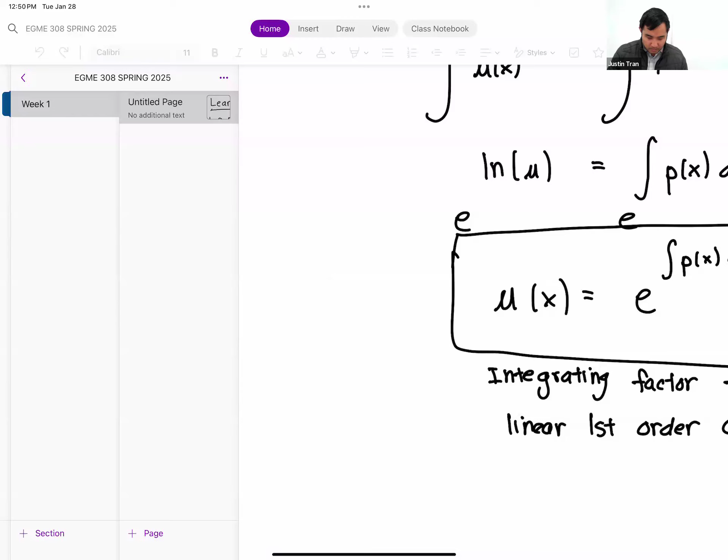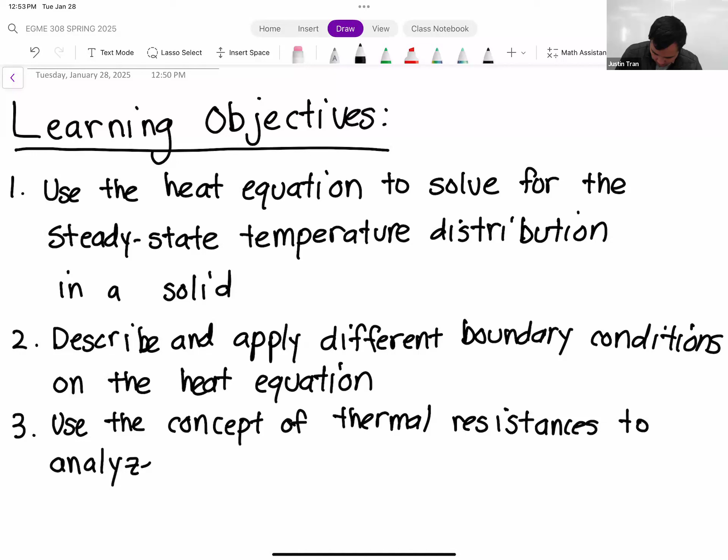So, for my graduation, I went into my graduation status this morning. And I applied back in like October. I'm still in the department. Yeah, we're working on it. So the first 2 weeks are a little bit hard for us to get to it just because things are a little bit hectic. But we're gonna get to it weeks 3, 4, 5, and 6. Gotcha. You'll be good to go. Okay, cool. Because I want to double check, like I said, it's been like 2 months now. So administratively, we didn't pull it until January. The system only lets us pull then. You're in the system. We're gonna do it probably in the next couple of months. Okay, perfect. Thank you.

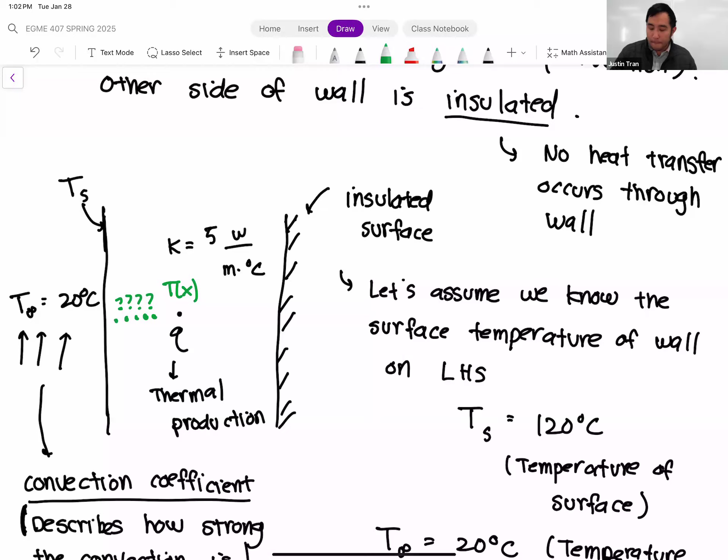And so in this problem right here, we have a wall, and we have numbers this time, which we didn't have last time. The length of the wall is 50 millimeters. I don't have it included here, so let me go ahead and draw that in. So the thickness of this wall is 50 millimeters. We know the thermal conductivity. Thermal conductivity is 5 watts per meter degrees Celsius, okay?

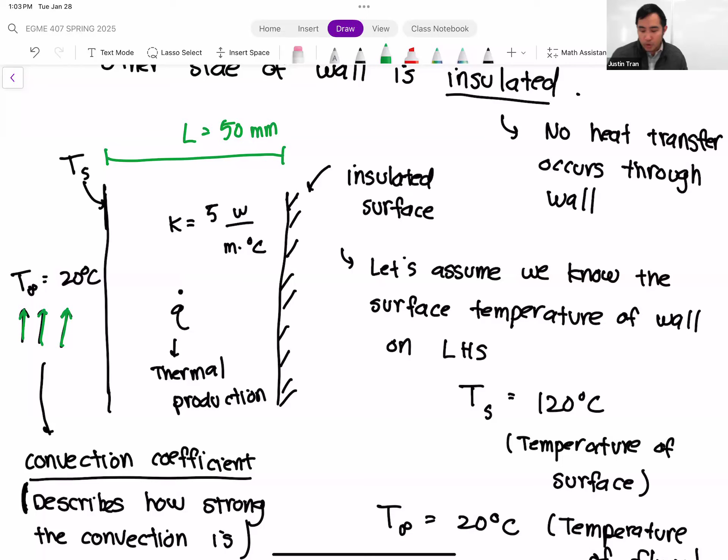One side of the wall is exposed to convection. So on the left side of the wall here, we have a moving fluid that's pushing past the wall. The temperature of that fluid is 20 degrees Celsius. And the right side of the wall is insulated. I mentioned it briefly last time, but insulated just means that there's no heat transfer that can occur past that wall. It's very much the same thing as an insulated oven mitt, right? The reason you use oven mitts is that they're made of a material that makes it very difficult for heat to pass through them.

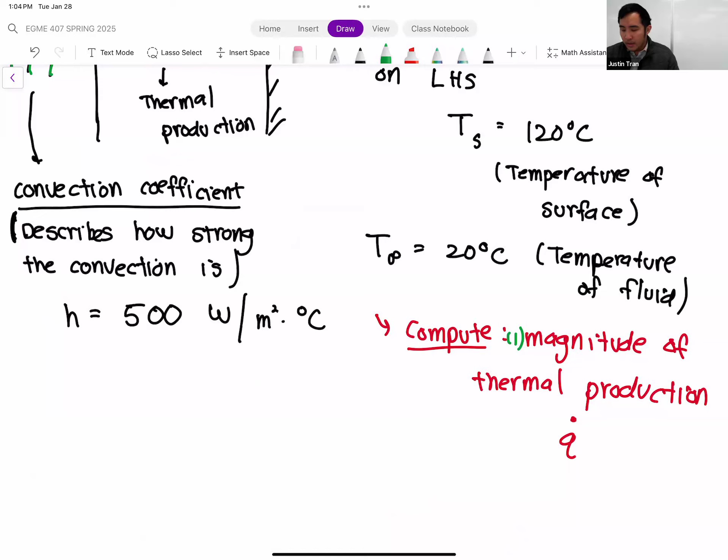Another thing that we know is the surface temperature on the outside of the wall here. So this TS right here is 120 degrees Celsius. And we actually want to compute a couple things in this problem. So, here's our setup. One thing that we want to compute, that we mentioned last time, is the magnitude of thermal production that's going on in this wall, because this wall is special. It's actually able to produce heat. But along the way, we're also going to be solving the heat equation, so we also want to solve for the temperature distribution.

T of x. We're going to be solving the heat equation, so we're going to get a solution for T of x just as a byproduct of that. So this is very similar to the last example that we did. It's just that there's some more stuff going on. So whenever you have a problem that's asking you to solve for the temperature distribution, or T of x, that tells you that this is a heat equation type problem.

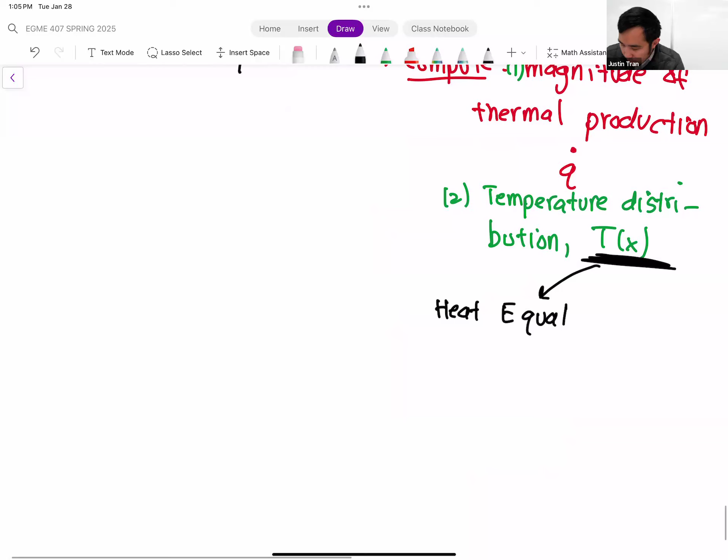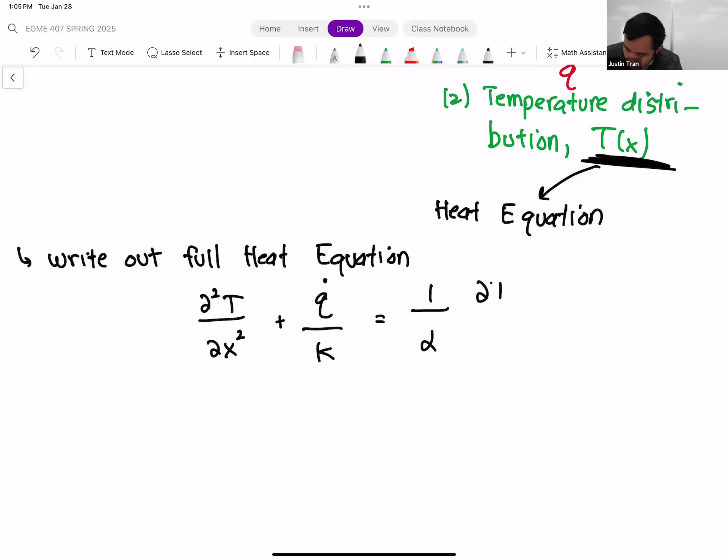And so heat equation problems always start by writing out the heat equation. So let's write out the full heat equation. You have partial squared T over partial x squared plus q dot over k is equal to 1 over alpha, partial big T over partial little t.

Okay, so I would recommend, whenever you have a heat equation type problem, start with this. I know in every single problem we're going to be canceling terms based on our assumptions, but it's always good to start here just so that you kind of know what you're doing. Okay. So our heat equation here, right now we can't solve it because it is a partial differential equation. So the next step is to cancel some terms based on our assumptions.

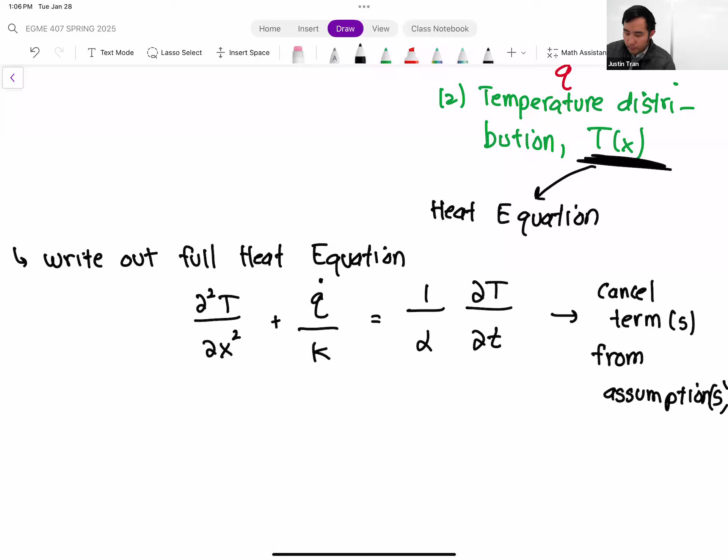So let's list out some assumptions for this problem. For this problem and for basically every problem that we're going to be doing, the first assumption is that we have a steady state problem. So any partial derivative with respect to time equals 0. You can see we have one term like that: the entire right-hand side, where we have the partial derivative of the temperature with respect to time. From the steady state assumption, we can cancel that out.

As a consequence of this, we can take our spatial derivative and transform it into a regular derivative. This is mostly a superficial change, but it is true because now our temperature is only a function of x. Since it's only a function of one variable, we can change the partial derivative to a regular derivative. It doesn't really change the way you solve it. You're still going to be integrating it, but it's good to change.

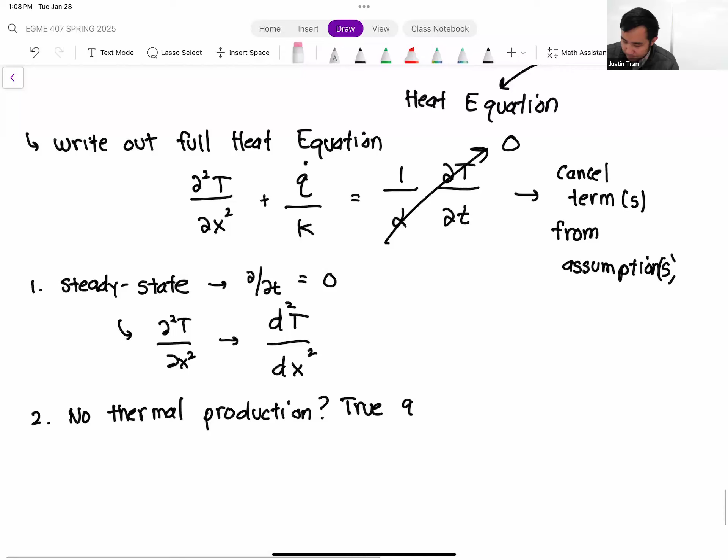Now, if you look back at our last example problem, another assumption we made was that there was no thermal production. That's normally going to be the case because most materials that you're going to be working with as an engineer are what I call inert materials, so they're not capable of producing any kind of thermal energy. I'll say this is true 90, even higher, maybe 97.333 repeating percent of the time. So thermal production is not a common occurrence.

Thermal production, remember, is the second term in this equation, the Q dot over K. Normally we're going to cancel that term out as well. But this problem belongs to the 2.6666 repeating percent of the time where we actually do have thermal production. So in this case, we're not going to cancel it out, but most of the time you are going to cancel out that Q dot term.

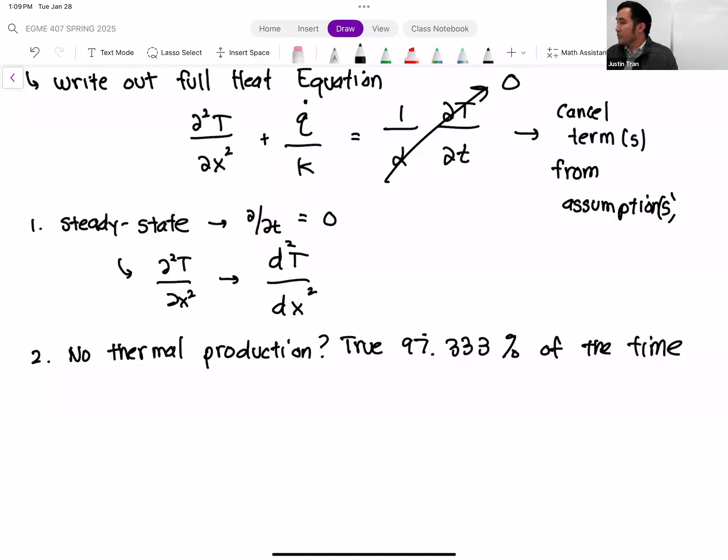Questions? A reminder of what alpha represents. Oh yeah, we didn't actually cover that last time. Alpha is a parameter known as thermal diffusivity. I skipped over it because right now it's mostly not relevant since we're doing steady state stuff. We'll come back to it in week 4 or 5, depending on our pace, when we do transient conduction. In a nutshell, thermal diffusivity tells you how quickly your material can absorb and store heat. It's almost like thermal capacity, but combined with a couple other things like density and thermal conductivity. For now, it's mostly not relevant.

Since we're going to keep the thermal production term, let me rewrite our heat equation. For this particular problem, our heat equation is like this. The good news is that the thermal production and the thermal conductivity are both constants, so neither depends on x. So we can subtract this term from both sides, moving it to the other side of the equal sign. So we have d²T/dx² equals minus q dot over k. And since that term is a constant, we can now integrate.

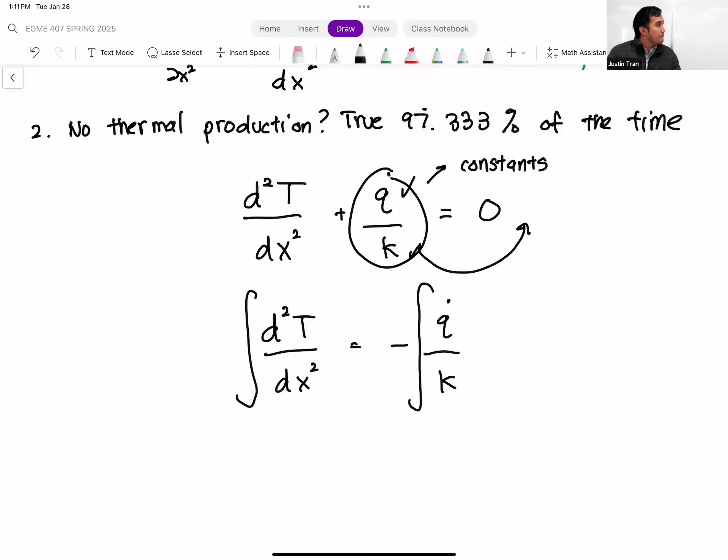Okay. And we can just integrate this straight up, which is quite nice. So we integrate this with respect to x. On the left-hand side, that integration is going to cancel out with one of the derivatives, and so we just end up with dT/dx. On the right-hand side, we integrate q dot over k, which is a constant. So you have minus q dot over k times x. We have to add our C1, because we're doing an indefinite integral.

And then to complete the problem, let's integrate one more time. We integrate one more time, we get T of x is equal to, we have integral of minus q dot over k x, which is minus q dot over 2k x squared plus C1 x plus C2.

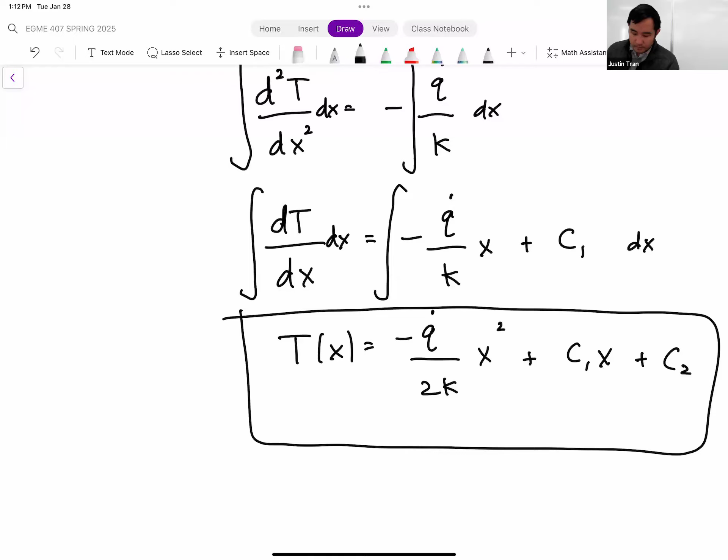All right, and then once again, we arrive at this point. We have a solution to the heat equation, but it's only a general solution because it's only specific up to a few arbitrary constants. So C1, C2 right now are still unknown. And technically, we have one more unknown in this problem because we don't know the thermal production term as well. So right now in our solution, we have three unknown values: q dot, C1, C2.

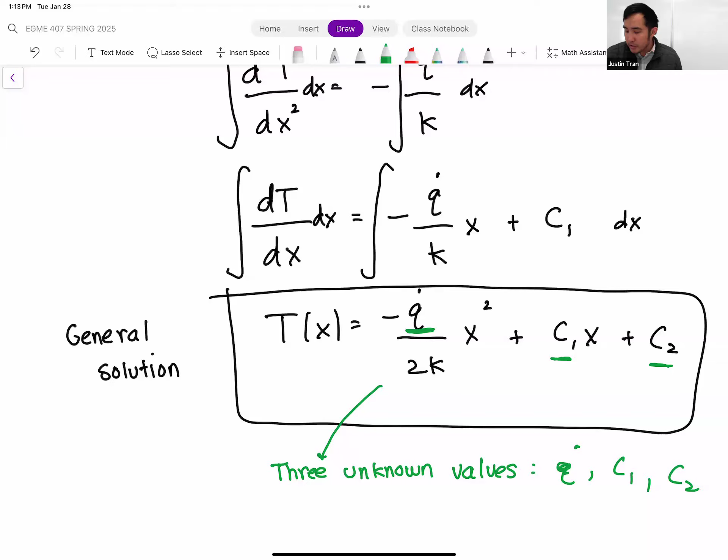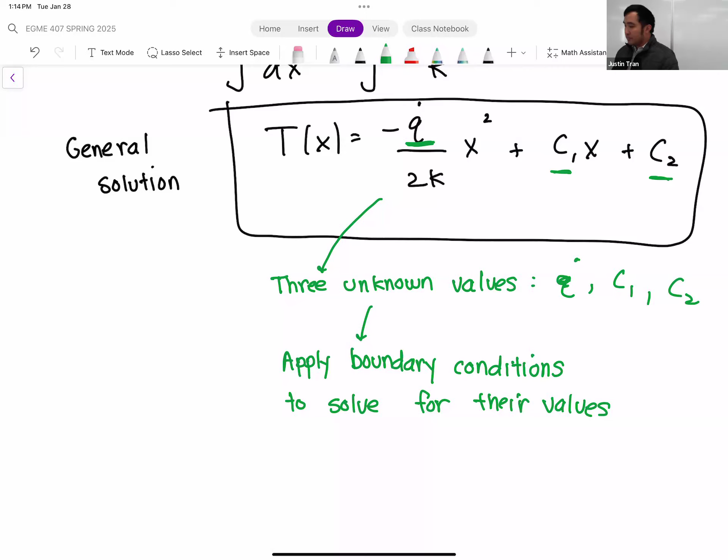Okay. All right, any questions up to this point in the problem? Okay, good. So we need to find values for these three quantities. Just like we did in the first problem, the way we're going to solve for these quantities is we're going to apply boundary conditions. So we need to apply conditions based on the problem statement in order to solve for their values. Since we have three unknown values here, we need to apply three boundary conditions. We're going to do this 3 times.

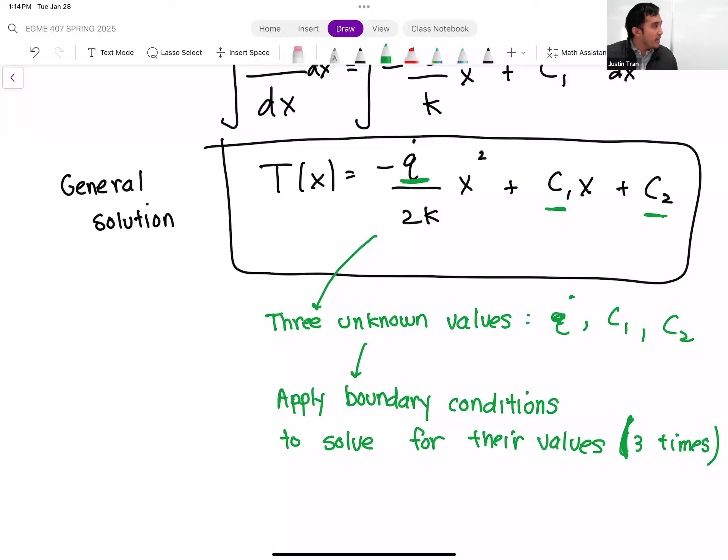Okay. So this problem actually introduces us to a couple new types of boundary conditions, because the last problem we had, we only worked with one type of boundary condition, which was a specified temperature. This problem introduces a few other ones. Let me go ahead and highlight them for you here. I've scrolled back up here, we're looking at the problem again. So first boundary condition, let me start with the simplest one. Let's start with this one right here.

So this boundary condition is basically telling us that we have a thermometer that's right on the outside surface of the solid, and that thermometer is telling us that the surface of this material is 120 degrees C. So this is what's called a specified temperature boundary condition, which is exactly the type of boundary condition we did in the last example.

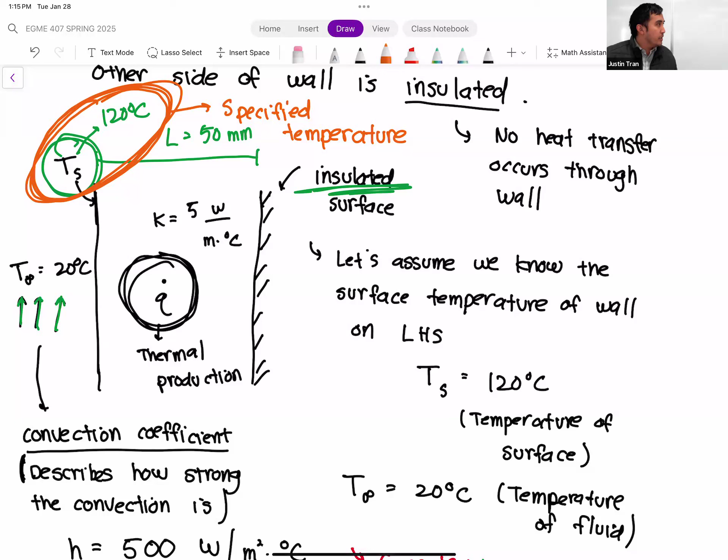Right? So we need to establish a coordinate system here too. Let me call the left side of this solid x is equal to 0. And then the right side of this wall, the one that's insulated, we'll call that x is equal to L. We need to know the locations of these boundary conditions in order to apply them. So let's start with the specified temperature boundary condition. Let's come down here. Specified temperature.

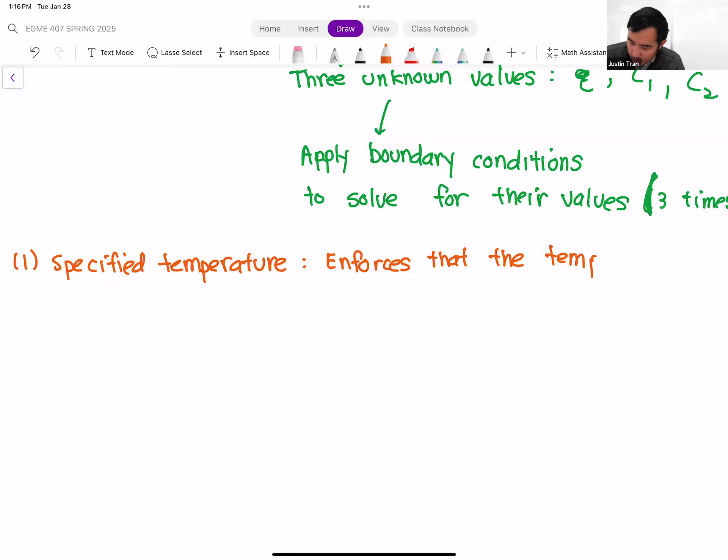So a specified temperature boundary condition is probably the easiest to work with, because basically what we could say is that we will enforce the temperature will be a certain value at a certain value of x. So for this problem, our specified temperature boundary condition states that T at x equal to 0 is equal to 120 degrees C.

Yeah, question. Not at steady state, can this assumption be made? No, that's a good question. So if we're not at steady state, then the surface temperatures could be changing, and so that's something that we would take into account as well. Yeah, it all depends on the problem and kind of what you're given.

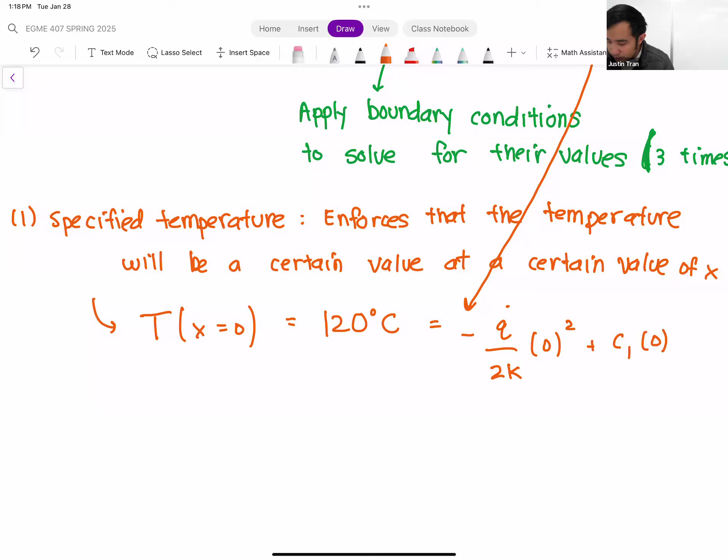Okay, so let's go ahead and apply this boundary condition. To apply it, we're going to take our general solution and plug in the specified value of x, so x is equal to 0. So we have minus q dot over 2k. Normally it's multiplied by x squared, but we plug in x is equal to 0, so that becomes 0 squared, plus C1 times 0 plus C2. That whole expression is going to be equal to 120 degrees.

All right, and so of course, everything here that's multiplied by 0, we're just going to cancel out. 0 squared is 0, C1 times 0 is 0. And so all we're left with here is 120 degrees is equal to C2. And that gives us the exact solution for C2.

Okay. So that one's pretty straightforward. So specified temperature, I think probably the easiest type to work with. Probably the most common too, just because thermometers are a thing and you can measure temperature on a surface pretty easily.

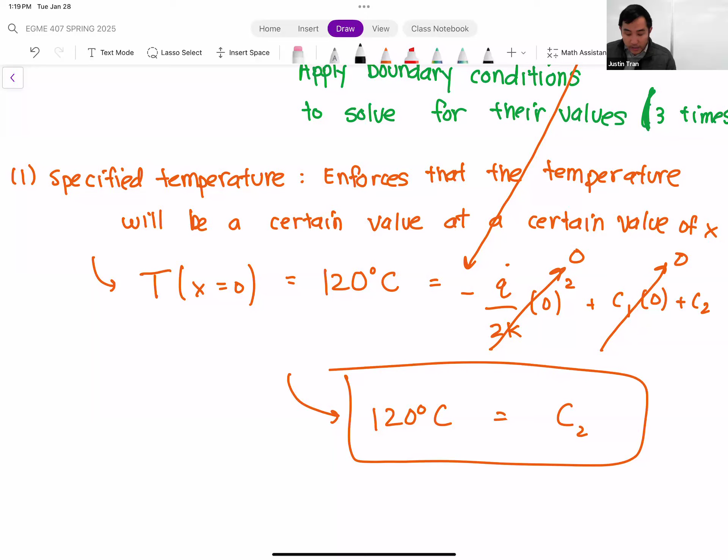Okay, so now let's get to the other boundary conditions, so the next two boundary conditions are going to be new. So let me scroll back up to the problem statement up here. Okay. So next boundary condition, let me use purple for that one. Let's do this one. And so whenever a problem tells you that you have an insulated surface or there's some kind of insulation, that's another type of boundary condition.

So this type of boundary condition is one that we call a specified either heat transfer rate or heat flux. I'll just call it specified heat transfer. Right. So insulation is a special case of this. Insulation just means that the specified heat transfer is 0, but it's possible to have a non-zero specified heat transfer. In fact, one of your homework problems has this as well.

Okay, so let's come back down here. So the second type of boundary condition that you can have on heat transfer problems is a specified heat transfer. And so in these types of boundary conditions, we are going to basically enforce that a certain amount of heat is going to pass through that surface.

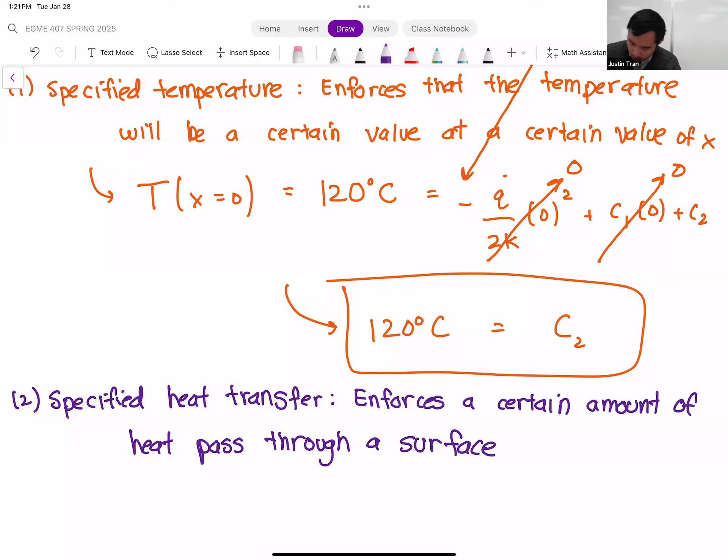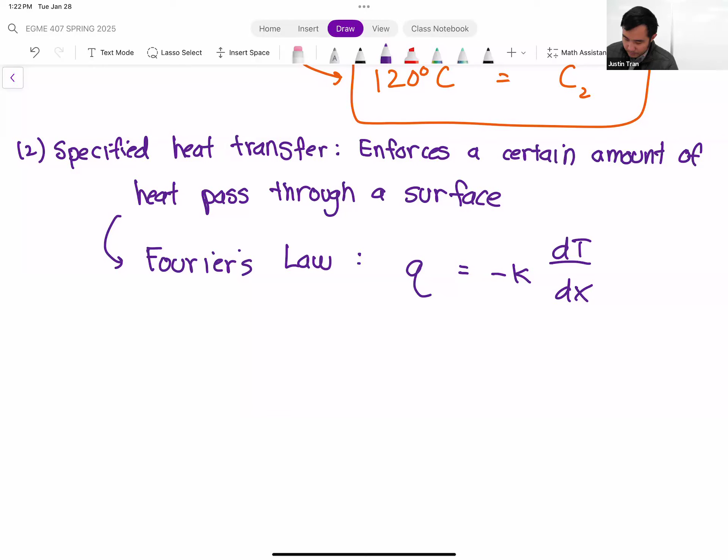And so how do we formulate this mathematically? Well, let's go back to the very first equation that we went over last Thursday. So we do have an equation that specifies heat transfer through a surface, and that's Fourier's law. So Fourier's law, remember, is Q is equal to minus k dT/dx. We're going to use Fourier's law in this problem, because we actually have everything that we need to plug into this equation.

So let's work on the right-hand side first. First, we have minus k. Thermal conductivity most of the time is going to be given to you, so you can consider that a constant. And then this quantity right here, we talked a bit about this last time. Remember, this quantity, this dT/dx, is known as the temperature gradient.

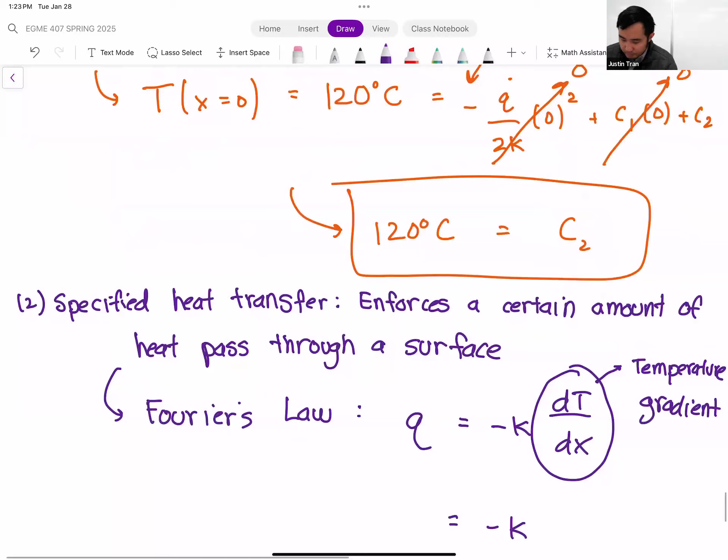And so I think last Thursday it was a little bit mystical. Well, we actually have everything that we need to compute this, because this dT/dx is nothing more than just the derivative of the temperature distribution. And we have that right here, right?

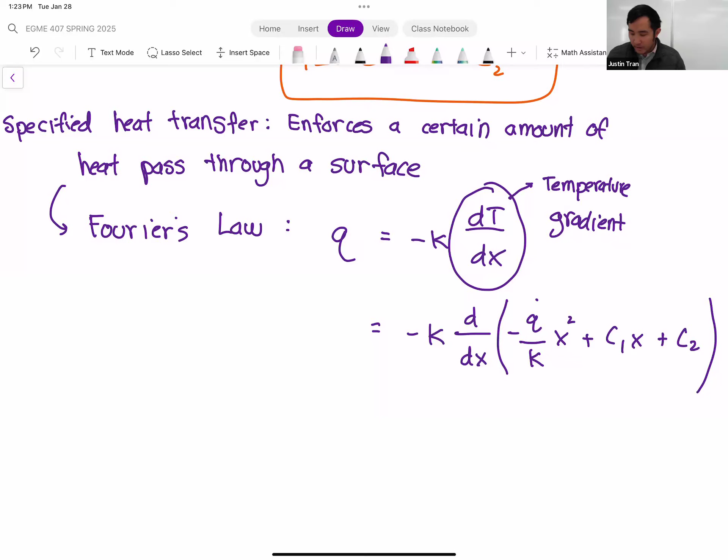So we're going to take d/dx of our temperature distribution. So our temperature distribution is minus q dot over k x squared plus c1 x plus c2. I know we already solved for c2, but I'm just leaving it here. It's gonna cancel out with the derivative anyway. So let's go ahead and evaluate this derivative. So we have minus k. We're going to take that x derivative and apply it to every term in here. Oh, I'm sorry, we need a minus.

Question from the chat: so is the heat equation the same as the temperature gradient then? So the heat equation is actually the second derivative of temperature, right? If we come back up to the heat equation here, we have a second order derivative. So the temperature gradient, you actually get it part way. If you're kind of clever, halfway through solving the heat equation, you actually do get the temperature gradient there, and you can just plug that in from there. And I did forget a 2 here. So there should be a 2 on the bottom there.

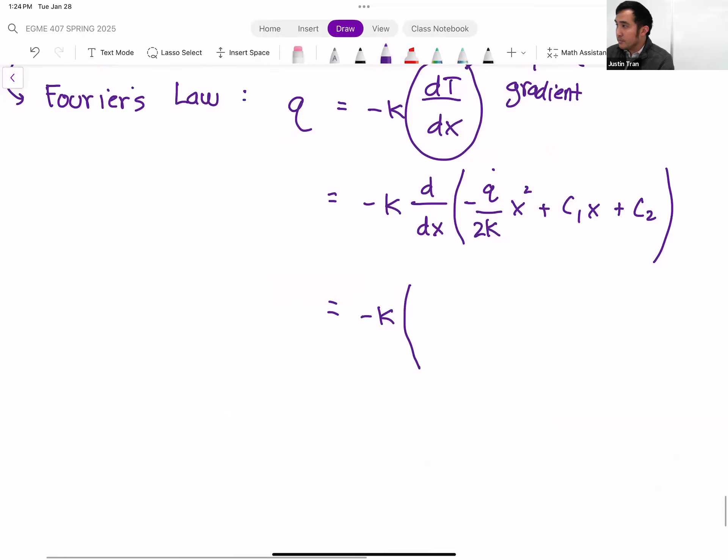Question, yes. I don't know if I noted it wrong, but is there an area missing? Yeah, actually there is. Fourier's law normally does have an area here. Thank you for catching that. But there is a different form of Fourier's law where you can actually divide both sides by the area. And so this quantity is actually Q over A. But this Q over A actually is a certain quantity as well, which is called the heat flux.

I know there's a bunch of terminology, so I'm trying to keep things square, but I end up being a little bit of a mess. But whenever you have Q over A, that's a quantity known as heat flux, which is the heat transfer rate per unit area.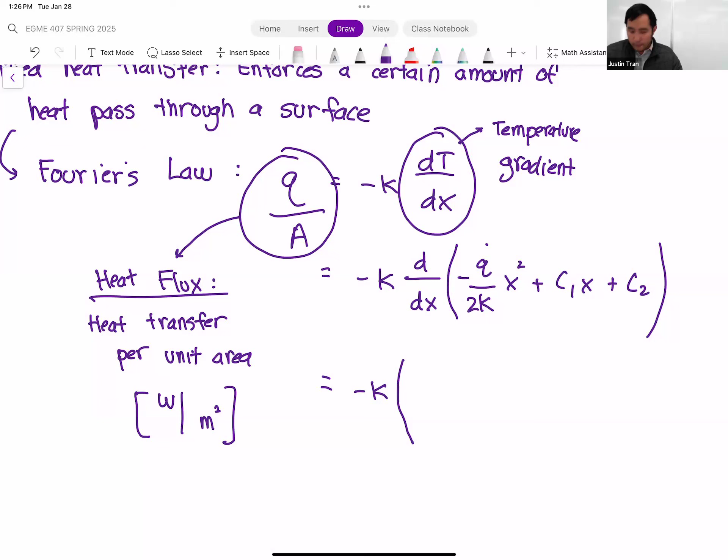And so the units for heat flux is watts per meter squared. Sometimes you'll see heat flux, sometimes you'll see heat transfer rate, it kind of depends on the problem. But something good to be aware of. Typically, actually, heat flux is given the symbol Q with two quotation marks. So that's usually the symbol for heat flux. But a lot of times, in this class, you'll see me use heat transfer rate and heat flux kind of interchangeably, but just know that there's a slight difference in the units.

That's omega over m squared, right? That's W for watts. Yeah.

Okay, so let's go ahead and apply this derivative here. So we have a minus Q dot over K times X plus C1. So that's what we obtained by just taking the derivative of our temperature solution. And then what we're going to do from here is we need to set this equal to a specified value for heat flux.

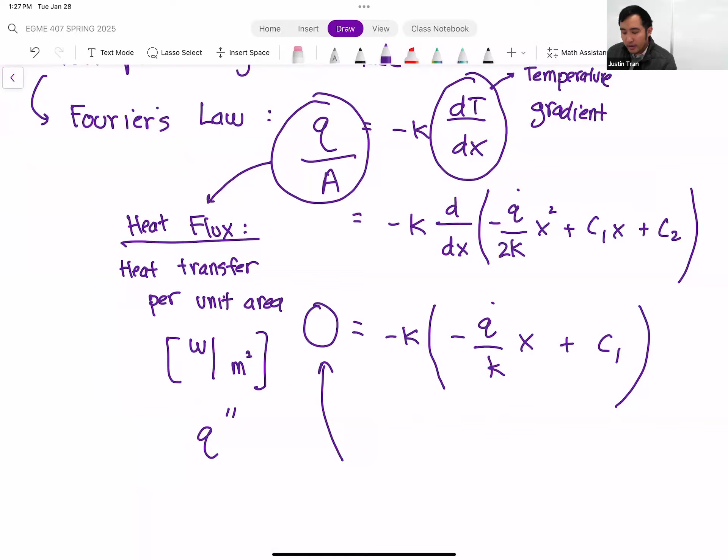All right. So the heat flux in this case is actually 0, because remember, our surface at that location is an insulated surface. So whenever you have an insulated surface, the heat transfer or heat flux through that surface is going to be 0.

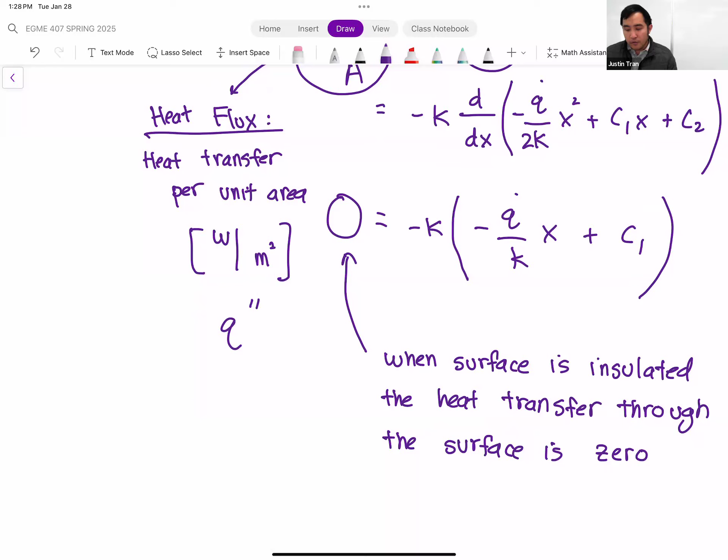All right. Last thing we need to do, so this equation here, we can't solve just yet, just because we have 2 unknowns, but we can at least plug in for X. And so last thing I'll do here is, this value of X here, let's plug in X is equal to L, because the insulated surface is at X is equal to L.

All right, so that was a lot. So let me go ahead and write this as one clean equation here, just for sanity's sake. So doing all that stuff, we have 0 is equal to, I'm going to take this minus K and distribute it through the entire equation. So we have Q dot times L, because that minus K up top is going to cancel out with the minus K on the bottom for that first term, minus K times C1. All right, any questions on how we got this result here?

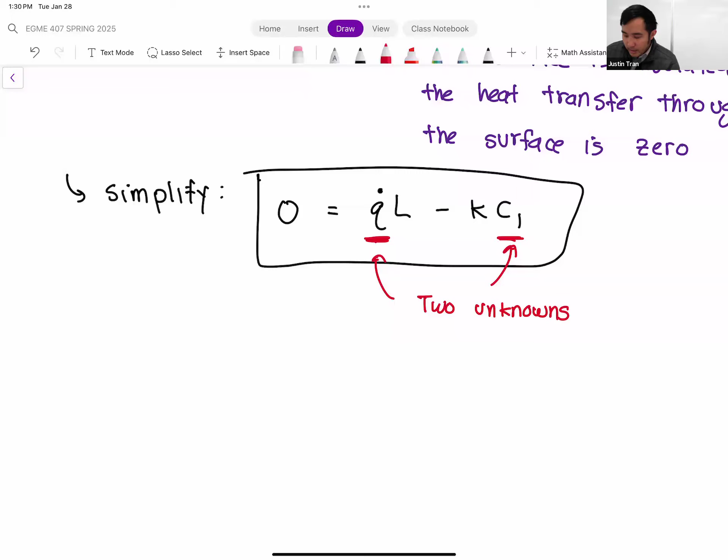Okay, so let's come back up to the problem, and let's introduce the last type of boundary condition that you can have on a heat equation type problem. So the last type of boundary condition is probably the longest to work with, but it's also quite common. And so the last boundary condition that we have here has to do with the fact that we have a moving fluid that's moving past the surface.

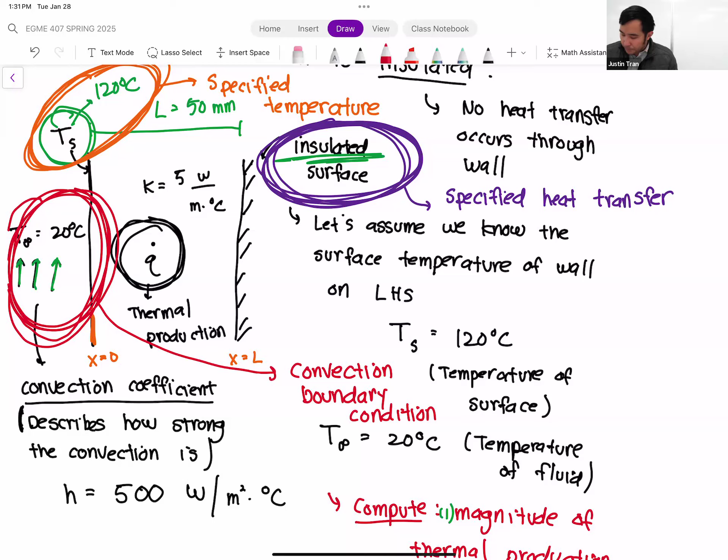And so whenever you have a moving fluid moving past the surface, you're going to have, most of the time, heat loss, but sometimes it can be heat gain as well. But you're going to have heat loss due to convection. And so this gives rise to our third type of boundary condition in our heat equation problems, which is called the convection boundary condition. So let me come down here and define what that means and mathematically how we actually work with it.

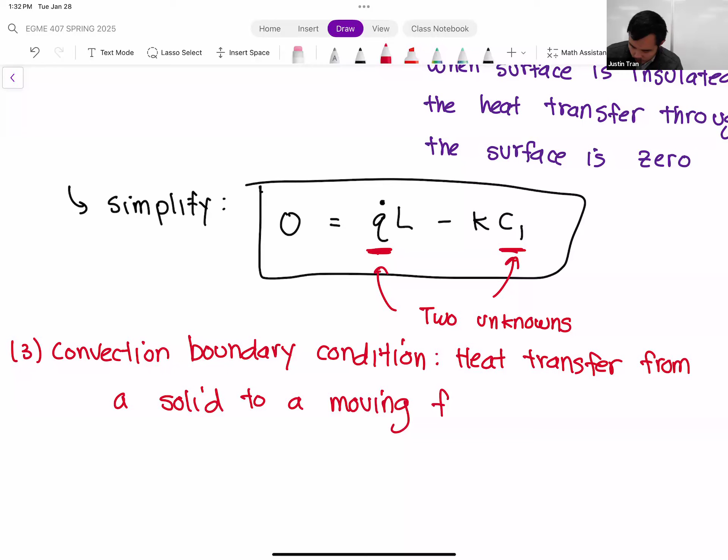So in a convection boundary condition, what's happening is that we have heat transfer from a solid to a moving fluid. And so when you have convection, we have to treat it a little bit carefully. So actually, with convection, Fourier's law actually does play a role here. Actually, let me do this.

So whenever you have a convection boundary condition, basically what you're saying is that the amount of heat transfer that's leaving the surface at a certain location has to equal the amount of heat transfer that's being gained through convection. In other words, we have our Q double prime from conduction. This has to be equal to Q double prime by convection, in parentheses, at a specified value X.

So essentially, the convection boundary condition is a statement of conservation of energy, which is whatever energy leaves the surface has to be gained by the fluid. So let's fill in values for this. For Q conduction, I'm going to go ahead and use the heat flux form. I'm going to divide by A. We know an expression for this. So we're going to use our good old Fourier's law.

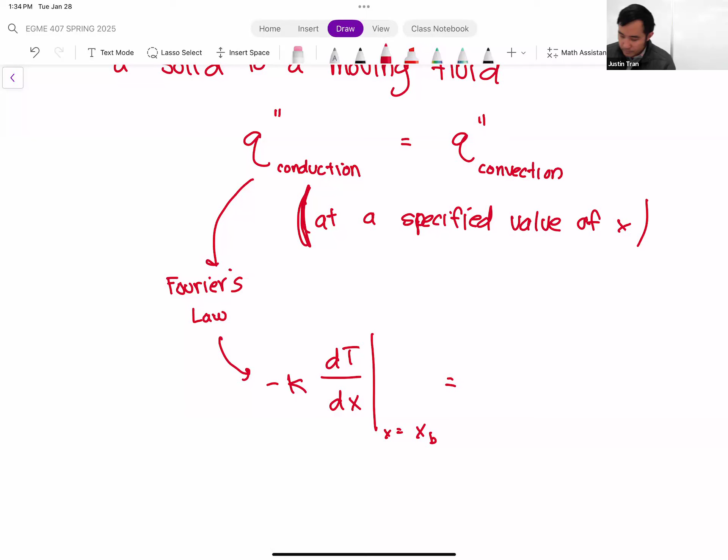And then for the heat loss due to convection, we're going to use another law of heat transfer, which was come up with by another famous, ancient mathematician. Believe it or not, it's from Isaac Newton. Less known for this than his contributions to classical physics, but this is important all the same. Okay.

So the heat transfer due to convection is given by what's called Newton's law of cooling. Okay. And so this equation is given by the following. We have H times T infinity minus T at X is equal to XB. Okay.

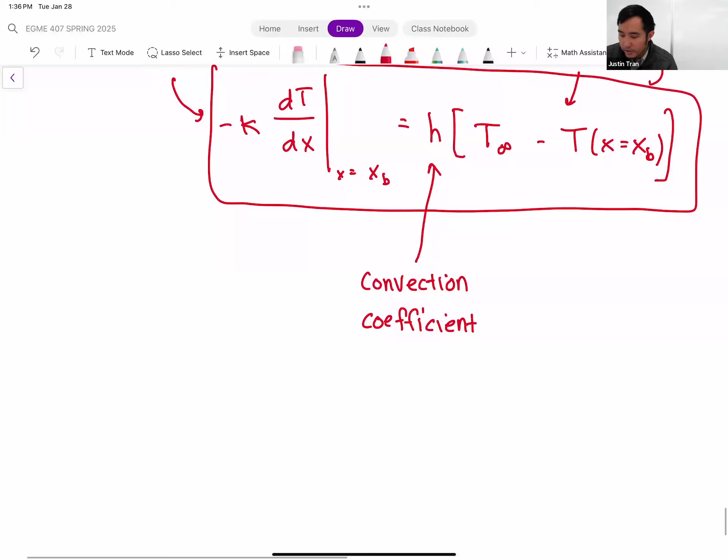Okay, so let me go ahead and define a couple of these new terms here. So first we have H. So H, of course, this is our convection coefficient. So we mentioned convection coefficient very briefly last time, but just to kind of remind you, convection coefficient, this is basically a property of the flow of the fluid that's moving past the surface. So this describes, kind of in a nutshell, how strong the convection heat transfer is to that fluid. Okay.

And that convection coefficient is actually a function of a lot of things. If you remember last time, it is a function of the type of fluid that you have, and so certain fluids will make it easier to transfer heat to. But it's also a function of the speed of the flow, the direction of the flow. And so we can't just say that it's a property of the fluid. It's not something you can look up in a table. It's something you have to solve on a case-by-case basis.

Okay. For now, for the first 5 weeks, this is something that's just going to be given to you. But the whole second part of the class, after the first midterm, we're going to find out how to actually compute this, which, you'll find out, there's actually not that many good methods to doing that, but we can do our best.

Is this similar to the conservation of energy, where heat is conserved when it's transferring from solid to a liquid? Yep, that's basically everything here. So basically this is saying that no heat is lost. Any heat that's lost from the surface or the solid has to go into the fluid. Gotcha. Yeah.

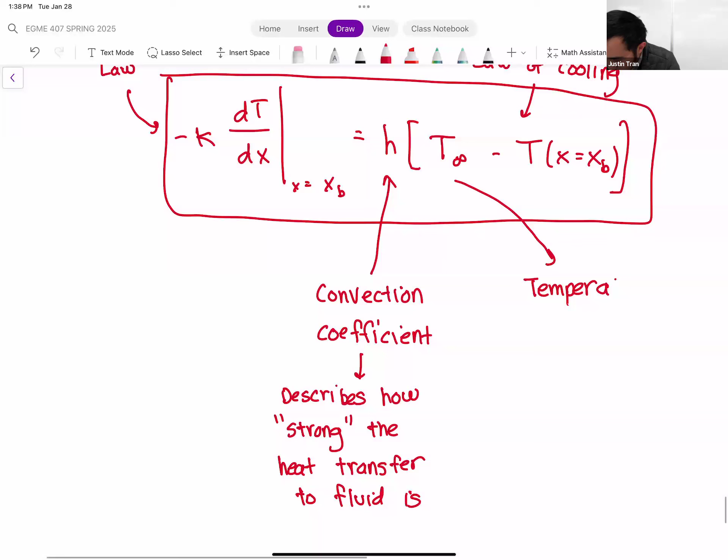And then the other parameter here that might be a little bit new is T infinity. So T infinity here is the temperature of the fluid. Why do we call it infinity? We usually call it T infinity because normally T infinity describes the temperature of some kind of ambient conditions, so it's the temperature really, really far away. But if you had a closed system, like a certain volume of water or fluid, you'd call it something else, right? You can call it something else, yeah.

But this expression was derived for a very large body. The reason we use T infinity is that usually for a large body of fluid, the temperature is pretty constant all throughout. But if you have a small space, you could have a gradient of temperature through the fluid, which you would have to account for too. Depending on how you compute H, you can account for that here, and instead of T infinity, you would maybe use the average temperature of that fluid, but it gets complicated. Convection is very complicated.

Question. The gradient can also be really close to a surface, right? And then it's basically just constant for the rest of the space. Exactly. In a smaller space, the gradient might matter more, but overall, it's going to be pretty widespread. Exactly. So this also accounts for the fact that you could have boundary layers too. This is the temperature of the fluid outside the boundary layer. That's kind of the more strict definition. All right, any other questions on this expression here?

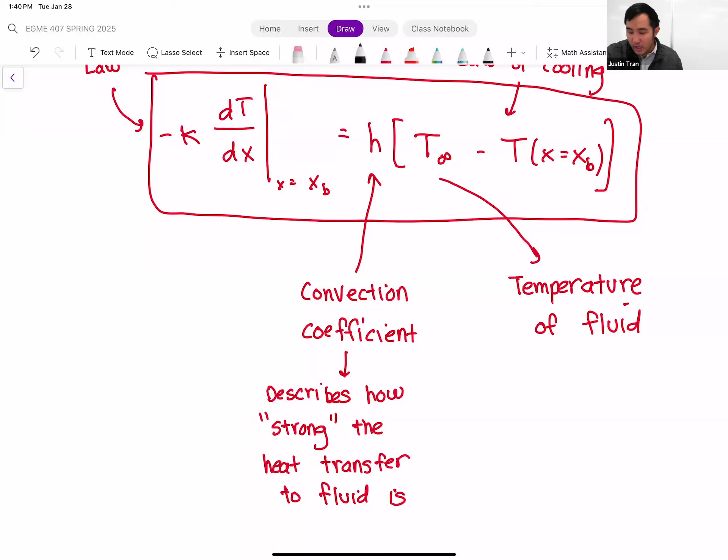Okay, so let's go ahead and apply it. We have actually quite a lot to plug in here. Convection boundary conditions are probably the least fun to do because you have to plug in two locations. You have to plug in for the Fourier's law, for the derivative, and you have to plug in on the right-hand side for the surface temperature as well, right?

Okay, so let's go ahead and plug in. Let me just scroll back up to the problem for a second. The convection boundary condition here is occurring at x is equal to 0. But that's only for this problem. So remember, for every problem, you have to check and see where your convection boundary condition is occurring.

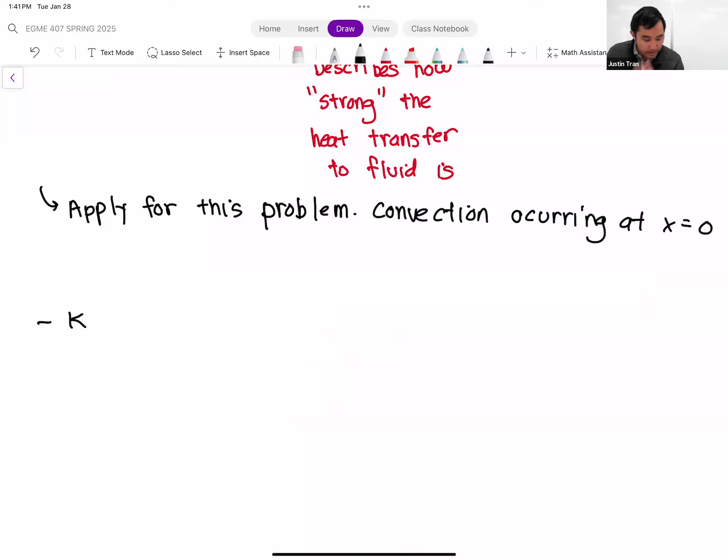Okay. So let's go ahead and plug in. So first we have the left-hand side, which is Fourier's law. So I'm just going to plug in for that just because we just computed it last time. So we have minus k multiplied by q dot over k times x plus c1. This is equal to h multiplied by T infinity minus T at 0. So T at 0, let me put another parentheses here. This is minus q dot over 2k times x squared plus c1x plus c2. So this right here is dT/dx. This right here is T of x.

Okay. So let's go ahead and plug in x is equal to 0. So basically everything with x here, we're just going to cancel out. So that first term there is going to cancel out. This term here is going to cancel out. And that C1x term is going to cancel out as well. So for this particular problem, it ends up working a little bit conveniently because we have x is equal to 0. And then we solve this through, we get minus k times C1 is equal to h T infinity minus h C2.

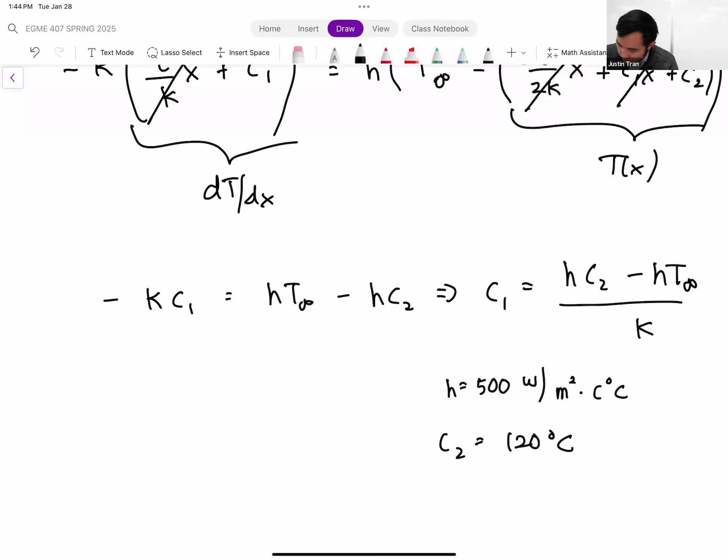And if we plug in our values here, let's see what we have. We have h is equal to 500 watts per meter squared degrees C. We know C2 is 120 degrees C. T infinity is 20 degrees C. And k is 5 watts per meter degrees C. So all those values were given to you in the problem. And so we plug all those in, and what we get is C1 is equal to 10,000 degrees C per meter.

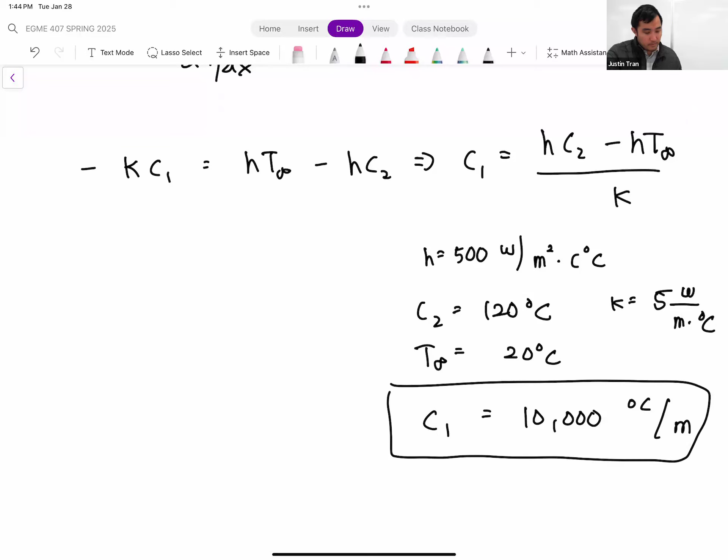All right, any questions on how we got this result here? Okay, sure. For h, what is the C before degrees Celsius again? That is just me being a derp, so that should just be degrees Celsius. Thanks for catching that. That should just be one degree there.

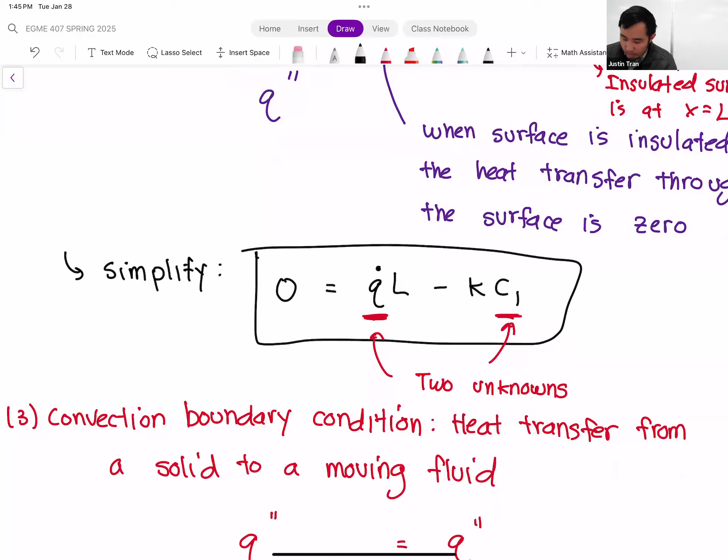So now that we have C1, let's go ahead and plug this back in to solve for q dot. So if we go back up a bit to our boundary condition number 2, we have this expression for q dot. So let's take that expression, plug in for C1 and solve for q dot. Our boundary condition 2: 0 is equal to q dot times L minus k times C1, I believe it was. My short-term memory is okay. Yep. So if we solve for q dot, we get q dot equal to C1 times k divided by L.

We have all the values here. I think the only new one here is L. But just to remind you, L is equal to 50 millimeters. But remember, we have to convert it all to the same unit system. So this is 0.05 meters. And so we plug all that in, we get q dot equal to 1 million watts per meter cubed.

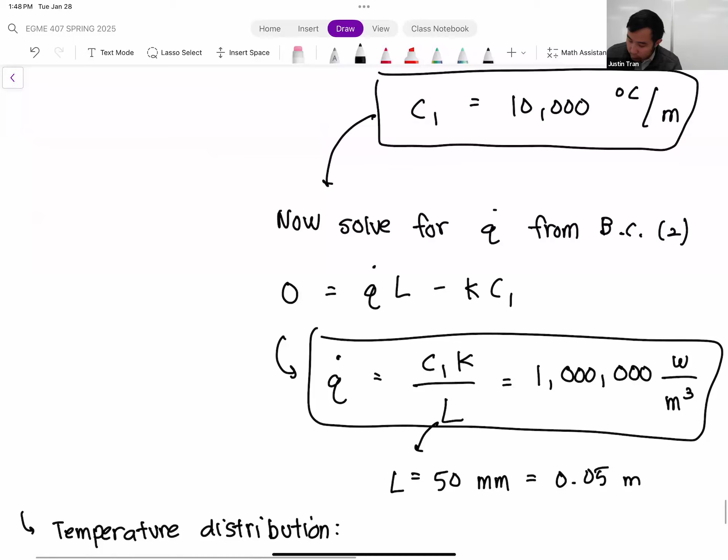All right, and so now that we have our 3 unknowns, we can put it all together. Let's plug in our 3 constants into our general solution and get our final answer for the temperature distribution. So our temperature distribution T of x is equal to minus q dot over 2k. K is 5 here. I'll just plug it all in. So we have minus 1 million divided by 2 times 5, which is 2k, times x squared, plus C1, which we know is 10,000, times x, plus C2, which is 120 degrees C.

Okay. We just simplify that first term there, so we're going to end up with a divide by 10. That's going to knock off one 0 here. And so our final temperature distribution here is minus 100,000 x squared plus 10,000 x plus 120.

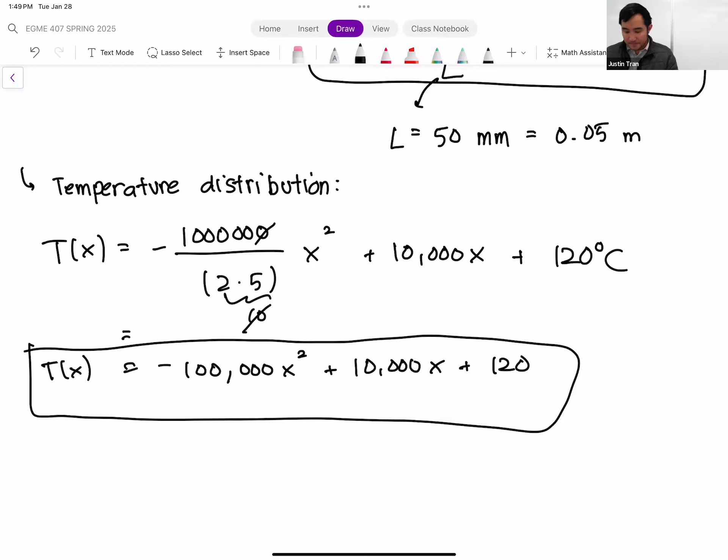All right, any questions on this example here? That whole thing is just degrees Celsius. Yeah, all things degrees Celsius. Yeah, so very long example, but we had to talk about the different types of boundary conditions. But hopefully with this one and then the example we did last Thursday, you guys should be good on heat equation stuff.

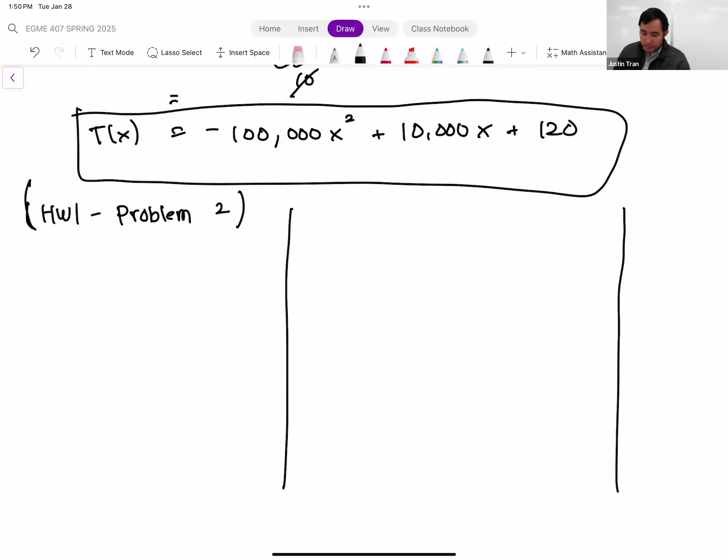Okay, one thing I'll note before we move on to thermal resistances, just to give you a little hint on the homework. So this is homework 1, problem 2. Homework 1, problem 2 is a heat equation type problem. It may not seem like it just from the picture, but it is a heat equation type problem. I gave you a very interesting situation here. What I tell you is that I'm giving you what's called a heat sandwich.

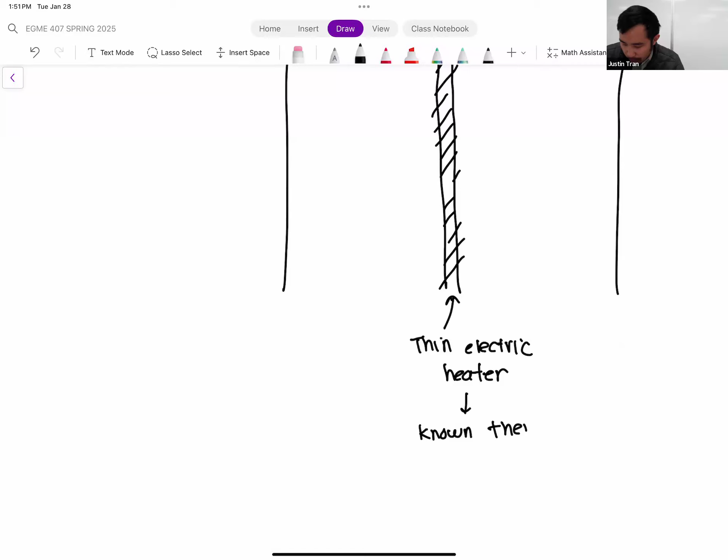So the geometry looks like this: you have basically 2 inert walls, and in the middle we have a very thin electric heater. This thin electric heater, you know the power output of this heater just because you bought it off Amazon or something, okay? So the thin electric heater has a known thermal output. Let's call that Q naught double prime. And so you can see it's given to you in heat flux, okay?

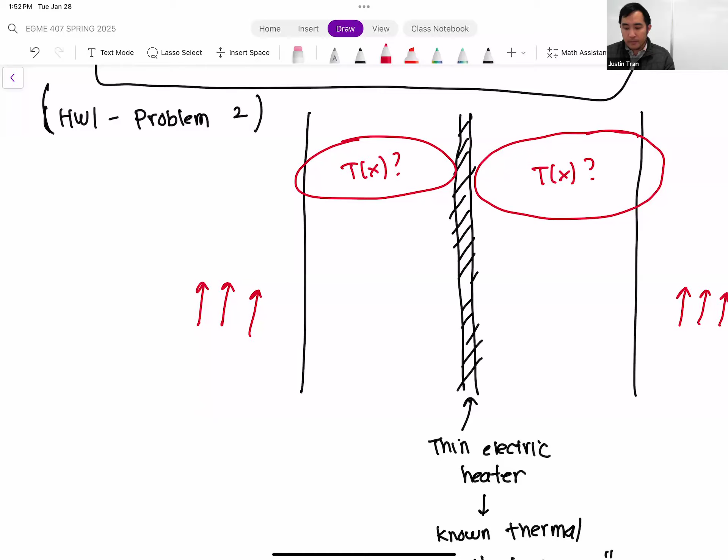And what the problem is asking you is, based on this, and I think there's a fluid moving on the outside too, so you have convection on both sides, to solve the temperature distribution within the solid itself. So first thing to note is to make use of symmetry. I think the problem may tell you this, but I'll tell you again. The left and right sides are identical, so don't solve for both, just solve for one. If you solve for one side, you solve for both sides. So first hint is don't solve both sides, just solve one.

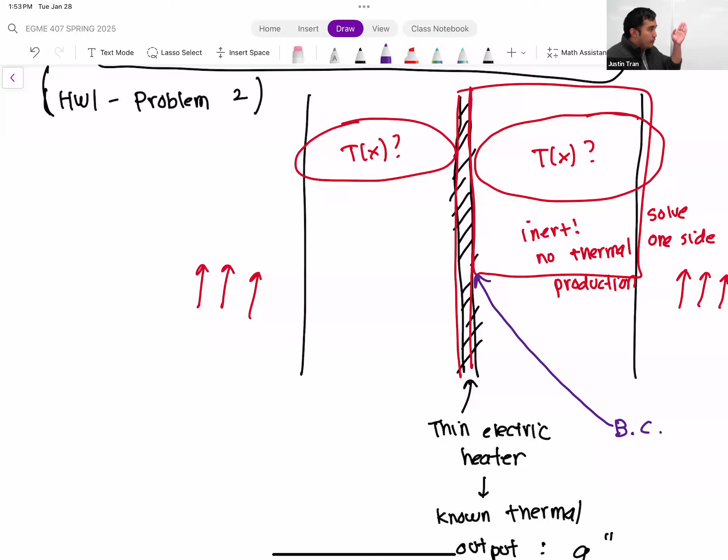And the other hint I'll give you is, it's a little bit confusing based on the wording of the problem, but the only place that can actually produce heat is this heater right here. Besides that heater, this material is completely inert. So when you're solving your heat equation, there should be no thermal production. But then how do you account for that heater? Well, one way is when you apply the boundary conditions on the surface that borders the electric heater.

When you apply that boundary condition on that side, you can use boundary condition number 2 for a specified heat flux. Because what do you know? You know that the heater is outputting a certain thermal output, and everything that heater produces is going to go into the solid. In the last example, we set Q equal to 0 because it's an insulated surface. Here, it's not going to be equal to 0.

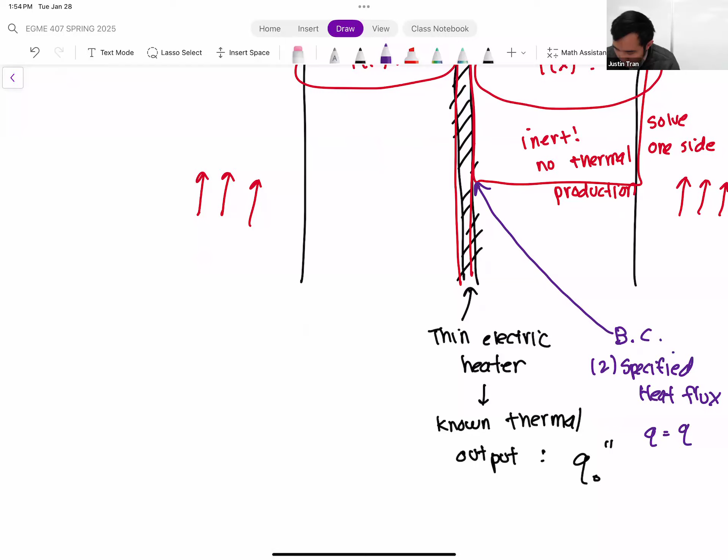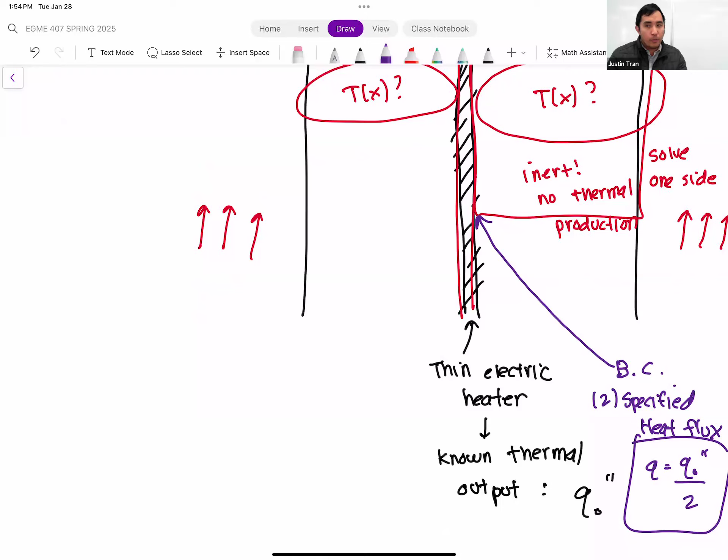So now the specified heat flux is going to be equal to the thermal output of the heater divided by 2. Why divided by 2? Because we have 2 halves here, and if you're only analyzing one half, only half of that heater's output goes into that side. So I know the wording can be a little tricky, but in the area you're solving, there's no thermal production. Just make sure you account for the heat transfer from the heater as a boundary condition. That's a lot of hints, so hopefully you'll be able to do that from here.

All right, so let's move on from the heat equation to our next topic, which is thermal resistances. Thermal resistance. So we just spent the last lecture and a half talking about the heat equation, and traditionally the heat equation is the way to solve heat transfer problems. You solve for the temperature distribution, and once you have it, you can solve for the heat transfer rate. But solving the heat equation for every thermal situation can be a little bit cumbersome.

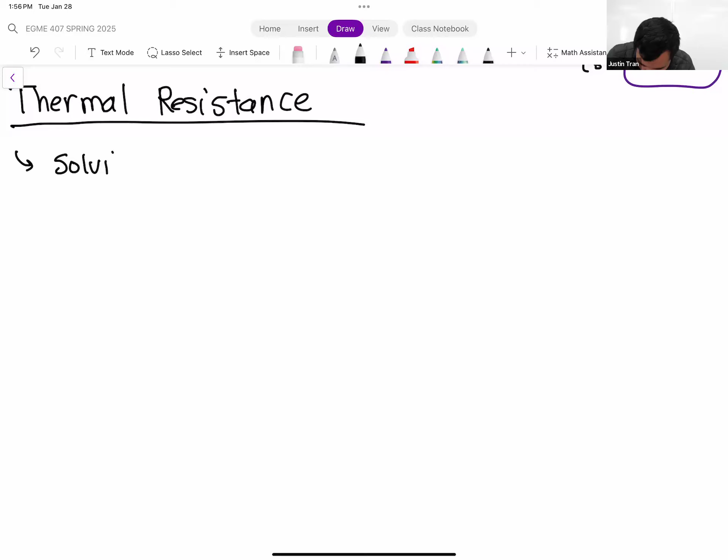Because you have to solve a differential equation, and you have to apply boundary conditions, and then you have to take the derivative. And so it's not always the most efficient way, especially when you have a relatively simple case, or in some cases a relatively specialized case. In fact, let me give you a situation which would be a pain to solve with the heat equation, which is a situation that happens a lot in practice.

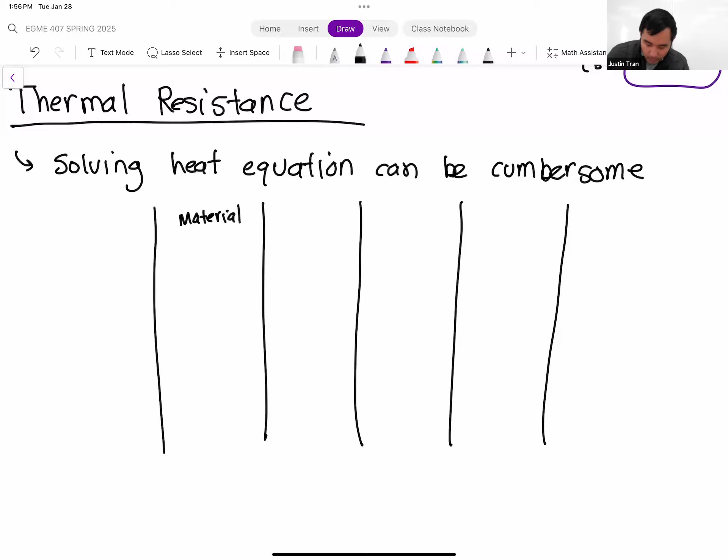So let's say that you have a layered material. Each of these layers here represents a different material. So this is material 1, material 2, 3, 4. And so they all have different material properties. They all have different thermal conductivities. They all have different lengths.

And so if you wanted to solve a problem like this, and by the way, this is very common. It's very common in thermal design to layer different materials on top of each other to take advantage of their thermal properties. In fact, one of your homework problems is like this too. So problem 3 is exactly like this.

If you were to solve this problem with the heat equation, you would have to solve the heat equation in every single layer of this material. So you'd have T1 of x, T2 of x, T3 of x, T4 of x. So that's 4 times you have to solve a differential equation, 4 times you have to apply boundary conditions twice, and 4 expressions for the temperature, which is a pain, especially for something that happens so commonly like this.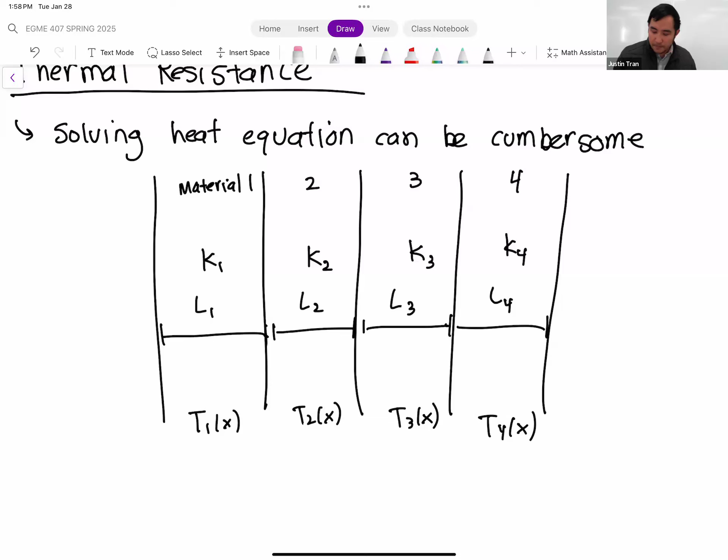And so thermal resistance, at this point it's not that new, but relative to the age of the heat equation, it is a new development to make analysis of these types of systems a bit simpler. So how does it work? And why is it called thermal resistance? If you've taken a circuits course, this will hopefully be familiar to you. If you have PTSD from circuits, don't worry, it's not going to be that bad. But it does help to have that intuition.

Because what happens for an electric resistance? So for an electric resistor, let me go ahead and draw our image here. In electric circuits, a resistance we can say has a resistance R. And if there's a voltage drop across the resistance, so a voltage V1, a voltage V2, and let's say V1 is greater than V2, what's going to happen in that situation? You have a voltage drop across a resistance. That's going to drive current across the resistance, right?

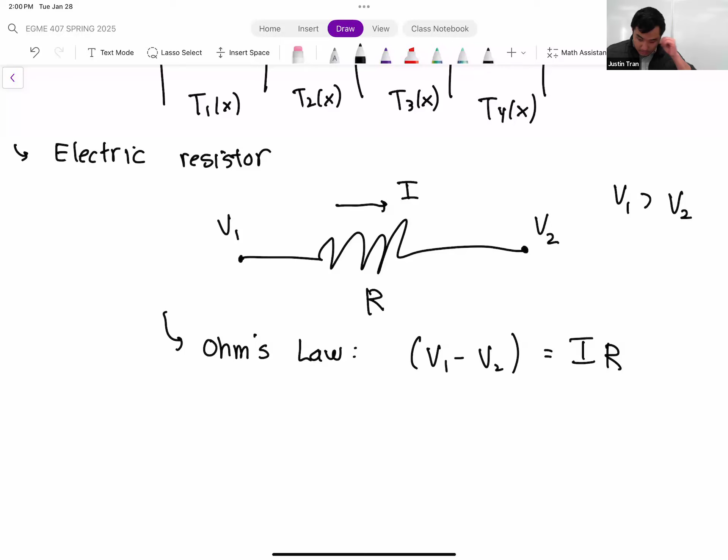And in fact, we actually have an equation for this. The equation that describes the amount of current that goes across a resistor is known as Ohm's law. Ohm's law basically says that the voltage drop, or V1 minus V2, is equal to the current on the resistance multiplied by the resistance itself. V is equal to IR. Probably the first equation you learn in electric circuits, and that's the only equation we're going to use, trust me.

So let's compare the situation to heat transfer. Because what's the fundamental law of heat transfer? It's not actually the fundamental law, it's just the way I think of heat transfer: heat goes from hot stuff to cold stuff, right?

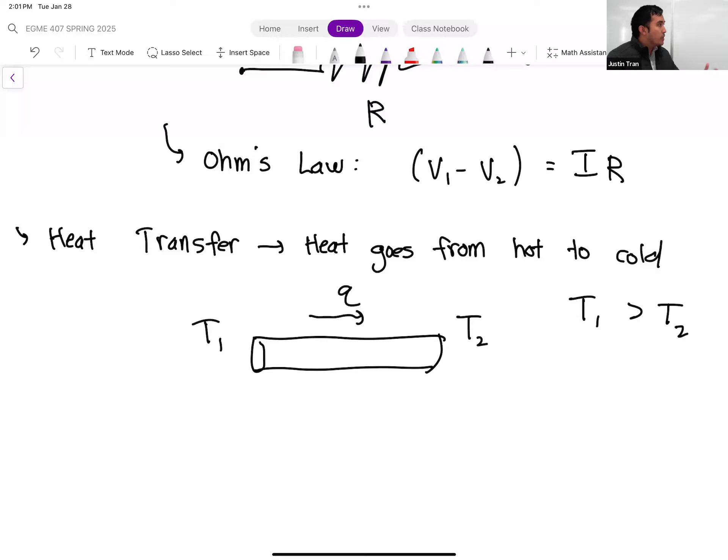And so if you have an object here, and this object is exposed to a temperature difference, so you have T1 on one side, T2 on the other side, and just for the sake of argument, we'll say that T1 is greater than T2, what's going to happen in that case? What we've been talking about for the last two lectures is that when you have a temperature difference between two points and there's a solid connecting them, that's going to drive some heat transfer across that surface. In other words, you're going to have a value of Q.

And so what if we form a similar Ohm's law here? So if we say T1 minus T2, instead of a voltage drop, we have a temperature drop. What if we say that T1 minus T2 is equal to the heat transfer rate multiplied by some resistance? Can we come up with something like an Ohm's law for heat?

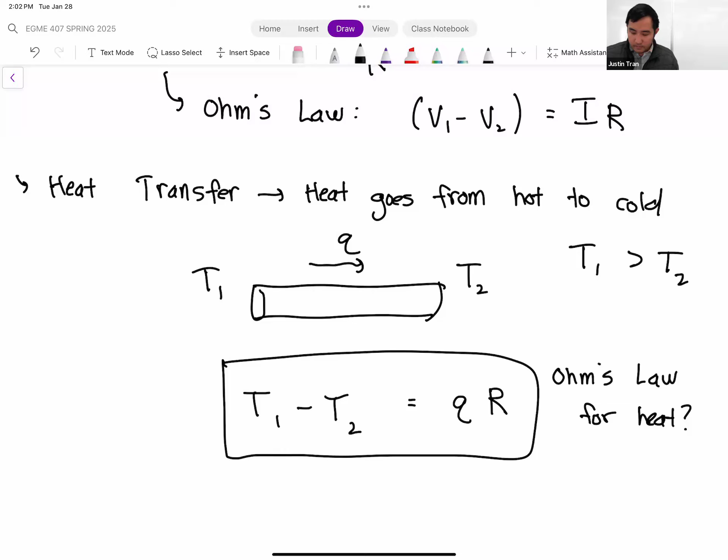And so, of course, the answer is yes. I wouldn't have brought this up otherwise if the answer was no. But the question is, what do we put for this resistance here, right? Because, unlike electric resistors where you can just go to Radio Shack and buy a resistor of a certain value, it's a little bit more complicated for heat transfer, okay?

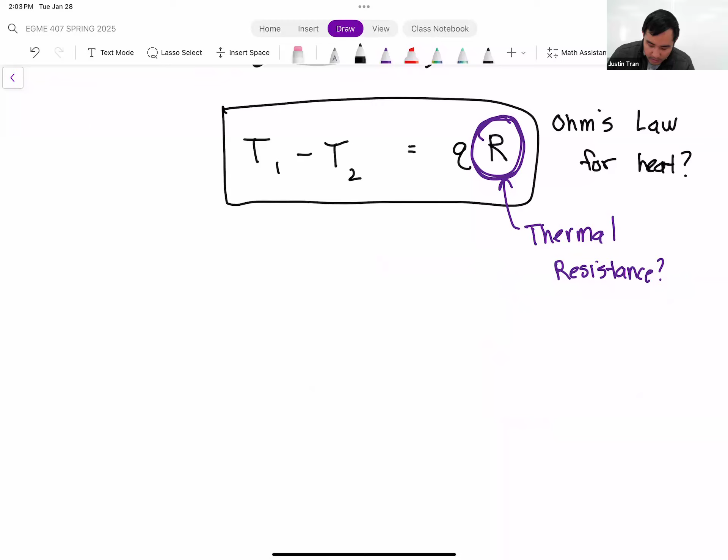So before we go today, let's come up with an expression for the thermal resistance, and I'll show you a few different applications for this. Okay. So to get an expression for the thermal resistance, let's once again start from Fourier's law. I'm going to use the heat transfer version of this one, so the area is going to be there. So we know Q is equal to minus K times A dT/dx. Okay. So that's our classic Fourier's law.

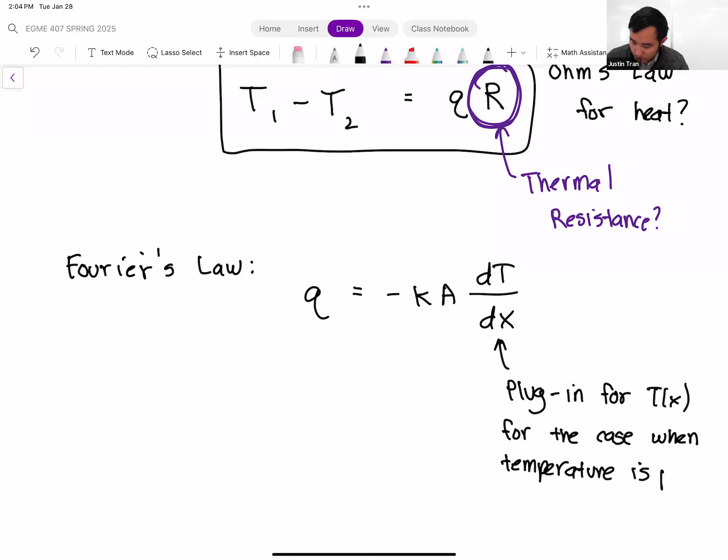Let's plug in for T here. Okay. Now, you might be saying that T of X should change with every problem, right? And you're right. So I'm going to plug in a very specific answer for T of X, and that's going to be the T of X when we have a specified temperature on both sides of the solid. Okay. We actually did do this specific case as an example. So this was the first example that we did last Thursday.

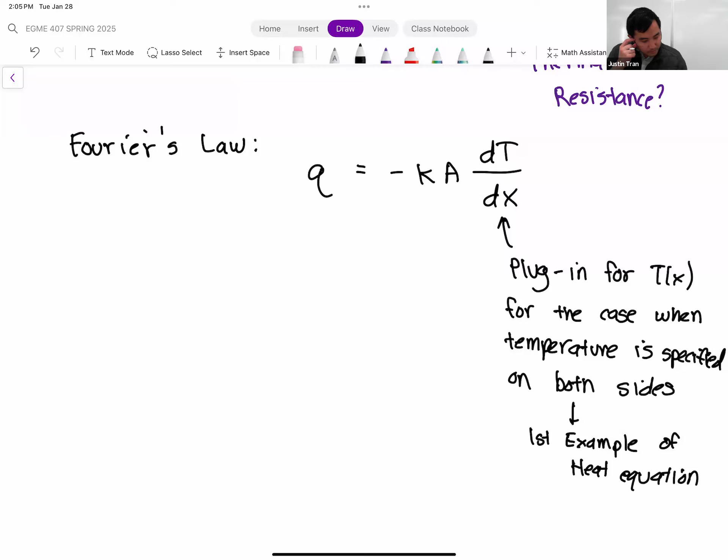All right, and so just to kind of refresh your memory, I'm going to write it in a slightly different form here, just so it's consistent with our expression above. So this expression here is given by T of X is equal to T2 minus T1 divided by L times X plus T1. Okay. All right, so that was the solution to example 1 last time. It's just I swapped the subscripts for the T just to be consistent.

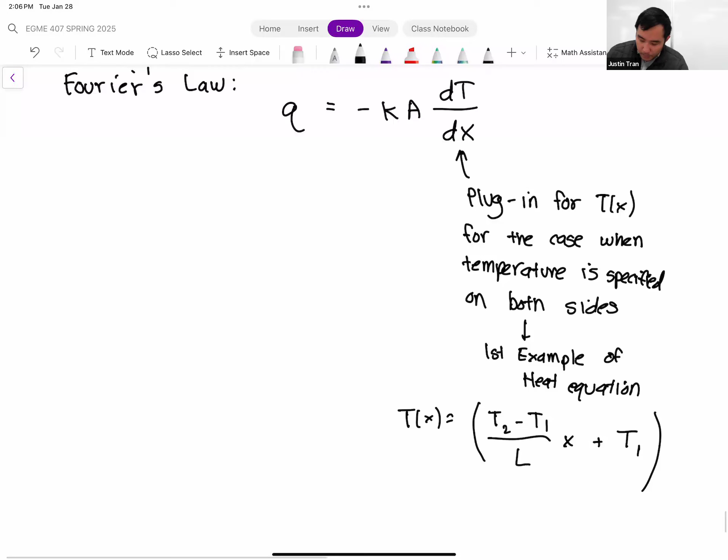Okay, so let's go ahead and plug that in here. So we have Q is equal to minus K times A. We're going to take the derivative of this temperature distribution here, which is pretty straightforward. So that's just going to end up being T2 minus T1 all over L. Okay. Let me go ahead and simplify this and rearrange the terms. So I'm going to take that negative that's out front. I'm going to distribute it through. So you have Q is equal to T1 minus T2, multiplied by K times A divided by L.

No, just regular Q. So this is heat transfer. This is heat transfer rate, not thermal production. So Q dot is thermal production. Q is just heat transfer rate.

All right. And so let me go ahead and rearrange this further. So I'm going to take this coefficient here, this KA over L, and I'm going to multiply by its inverse on both sides. So we have quantity L over K times A multiplied by Q is equal to T1 minus T2. And if we compare this to our Ohm's law, remember our Ohm's law is V1 minus V2 is equal to current times resistance.

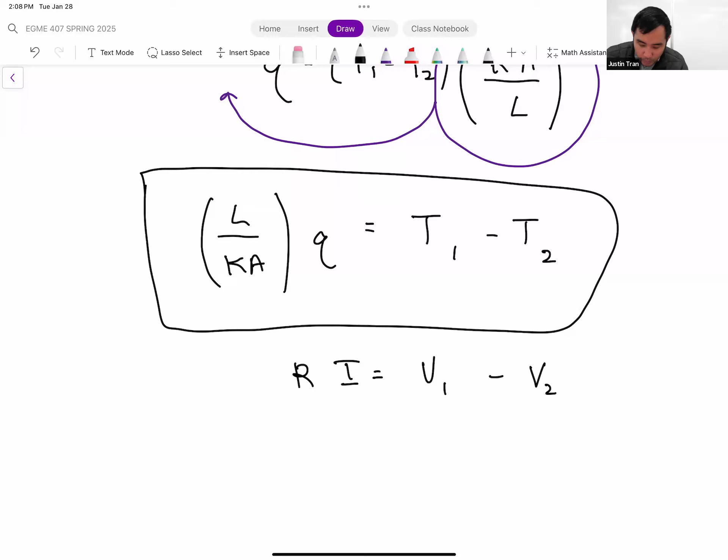Hopefully you see the analogy here, because now what we can say is that this expression in parentheses is basically acting like our resistance to heat transfer. So this expression right here, and let me actually bring it out here just to make it a bit more clear, is what's known as our conduction thermal resistance. Bless you. Okay. So our conduction thermal resistance, we'll call it R conduction, is equal to L, which is the thickness of the solid, divided by its thermal conductivity multiplied by its cross-section area.

This only works for solids. Yeah. But we're actually going to take this idea in later chapters and kind of extrapolate it to cylindrical systems and spherical systems too. This actually also works for convection, which we'll talk about in a second. All right, any questions on this?

Okay, so let's come back up to the situation that we kind of started this discussion with. Let's say that we have some kind of layered composite material here. Instead of solving the heat equation 4 times, what we can do is for each layer, we can represent each layer with a thermal resistance. Let me actually draw it up here. So we can say this is equal to resistance 1, resistance 2, resistance 3, resistance 4.

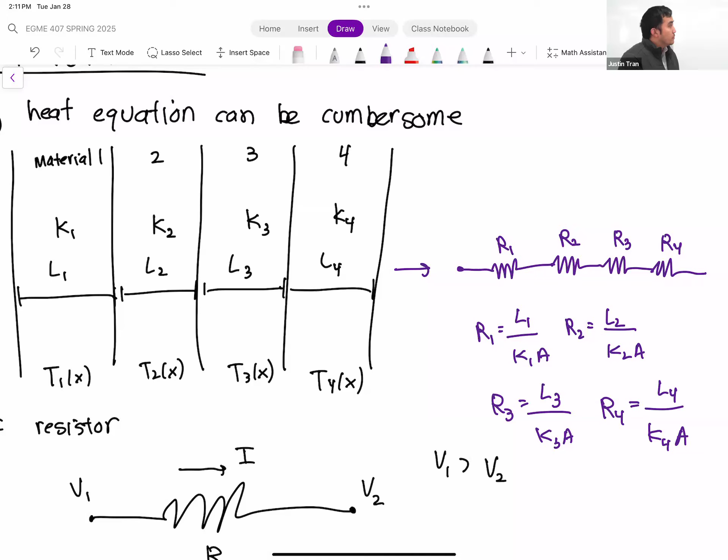And if we wanted to compute the heat transfer throughout this entire system, let's say that we know the temperatures at the endpoints. So let's say we know the temperature out here, T0, and the temperature out here, we'll call it TF or T final. So to compute the total heat transfer throughout this whole system, we would just do T0 minus TF, and then add up all the thermal resistances that separate T0 and TF. So we have R1 plus R2 plus R3 plus R4. And so you can solve this problem in just one step as opposed to solving 4 differential equations, because what you have is 4 resistors in series.

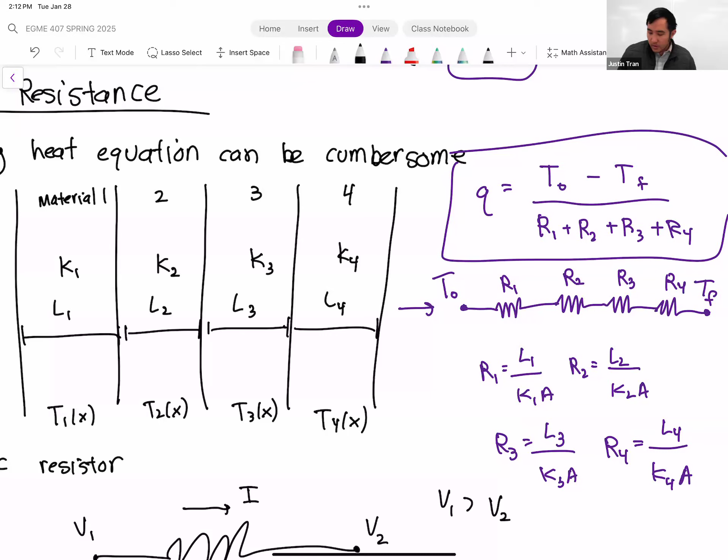All right, and so last thing before we go, there is a thermal resistance for conduction. We don't have time for an example today, but we'll do an example next time. But there's also a resistance for convection as well. So for convection resistance, let me go ahead and remind you that the formula that governs convection heat transfer is Newton's law of cooling.

So this right here is Newton's law of cooling. I added an extra A there because this is the heat transfer version. If you want the heat flux version, you just divide by A. We can come up with the thermal resistance here as well, because we have all the same ingredients to our recipe from before. We have heat transfer, we have a temperature difference, and we have everything else. And this everything else becomes the expression for our convection resistance. So resistance for convection is equal to 1 divided by h times A.

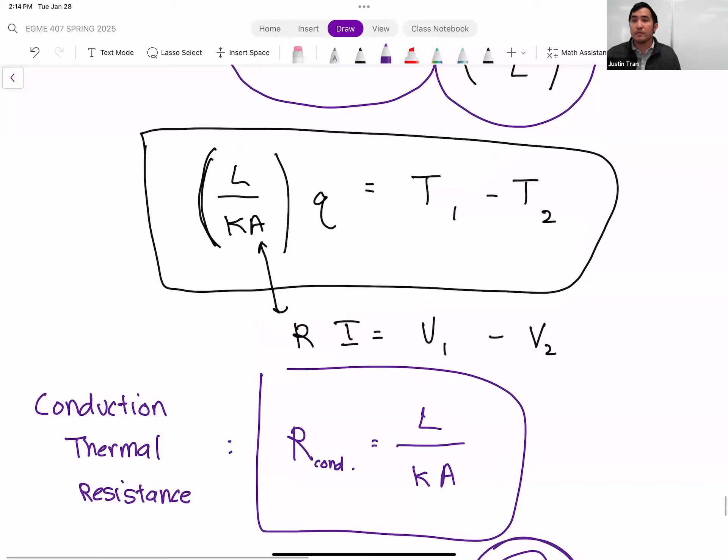A question. Go back up to your writing, like up at the start of the problem. Yeah. Yeah, all that on the side. Yeah.